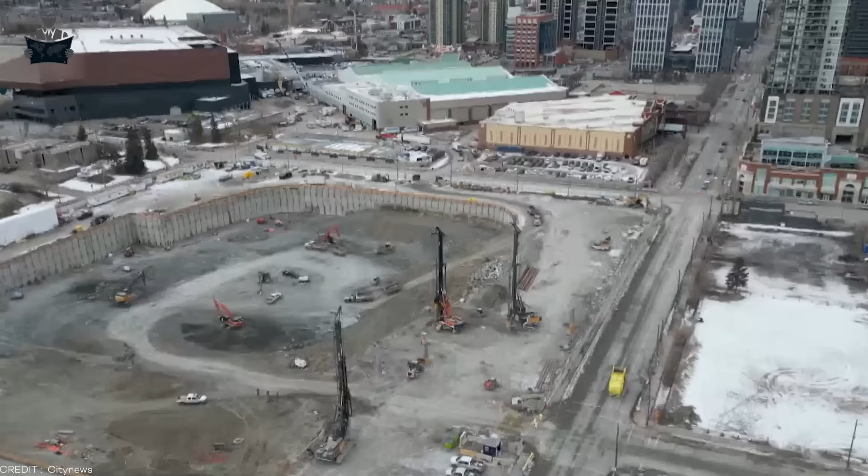At this very moment, a new arena is taking shape on the frozen soil of Calgary. But this is no ordinary arena. It's set to break records. However, these aren't the types of records to be proud of.

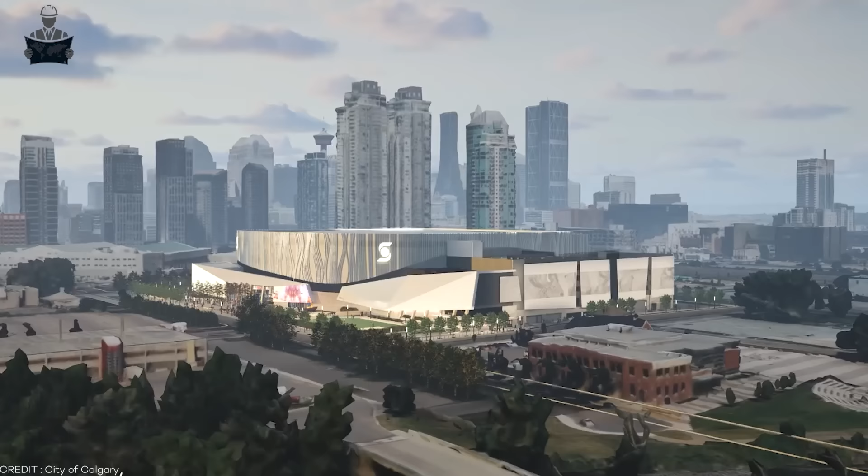With stunning architecture featuring a sophisticated facade, colossal screens, cultural motifs honoring history, and a sunken seating bowl that brings spectators closer to the action than ever before, Scotia Place is poised to set a new standard in North America, perhaps even the world.

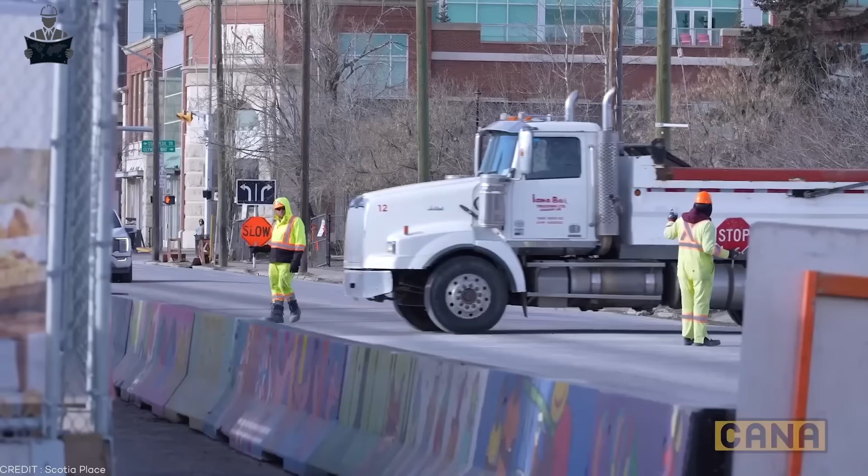As the deadline approaches and expectations peak, doubts emerge. Is the prematurely granted crown justified? And why is this project considered one of the most controversial in history? The time has come to delve into North America's new jewel, which, contrary to the chilly weather outside, is set to be on fire.

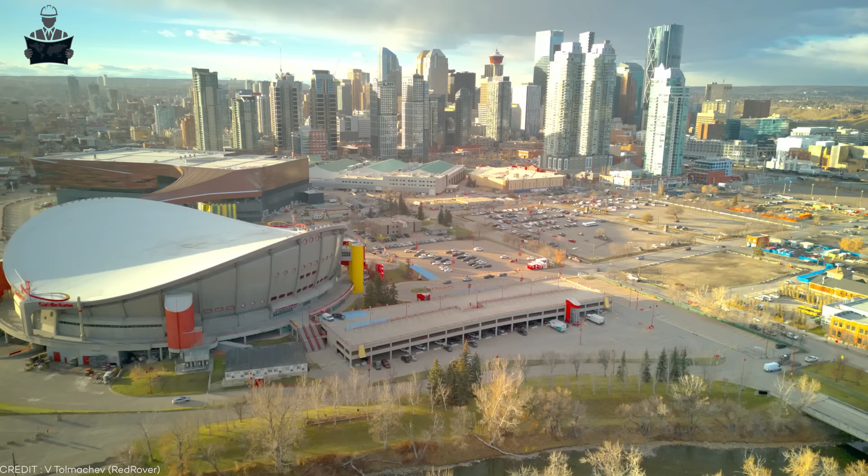Scotia Place didn't emerge out of nowhere. It's the product of years of planning, negotiations, and a bold vision for Calgary's future. The city's beloved Scotiabank Saddledome, home to the Calgary Flames for over 4 decades, was showing its age.

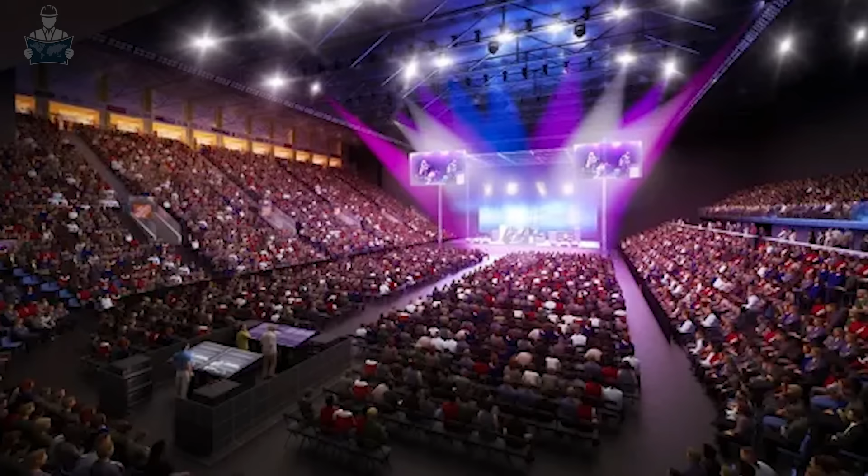Built in 1983, the arena hosted countless NHL games, concerts, and even the Winter Olympics. At the time, its distinctive saddle-shaped roof was an architectural marvel, making it one of the most recognizable arenas in North America. But its aging infrastructure, outdated amenities, and lack of modern revenue-generating features, such as premium suites and expanded concession areas, left it struggling to compete with modern venues across the continent.

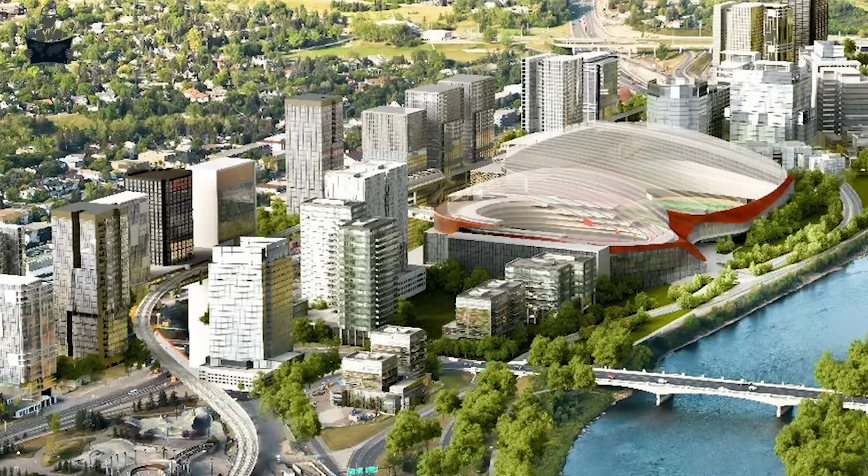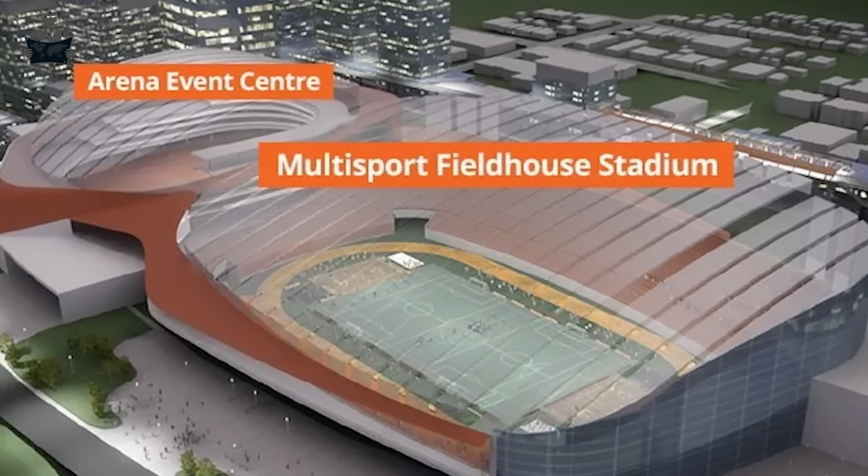The push for a replacement began in the early 2010s, but the most ambitious proposal came in 2015 with Calgary Next, a multi-purpose mega-project that aimed to replace both the Saddledome and McMahon Stadium. Planned for Calgary's West Village, it included a new arena, a football stadium, and a public field house.

However, what started as an ambitious plan for Calgary's future soon became a topic of intense debate, dividing opinions across the city. I'm not too sure about public funds going into it, considering it's a private corporation, but we'll see what happens. This is going to be a while before it's even finished.

Initial cost estimates of $890 million ballooned to over $1.8 billion, the equivalent of approximately $2.3 billion today, with taxpayers expected to cover the majority of the bill.

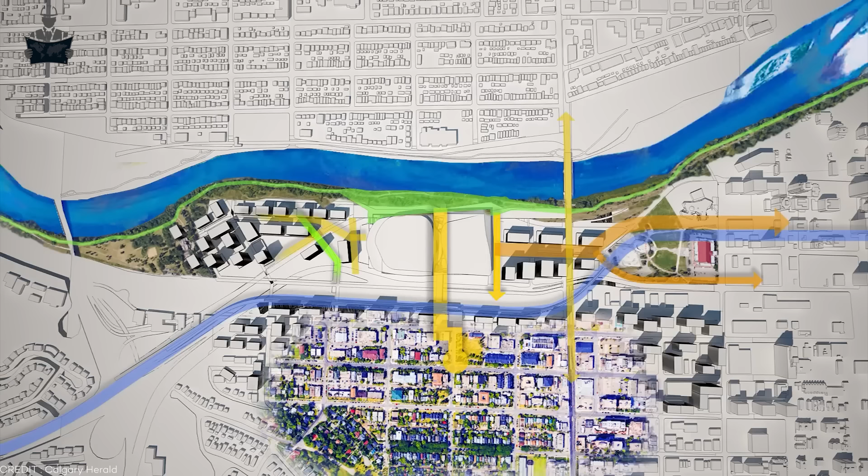Concerns arose over the proposed location, as the West Village site was contaminated with creosote, a toxic byproduct of industrial activity. Cleaning the land alone would have cost hundreds of millions. Skepticism grew over whether the economic benefits would justify the investment.

The project was met with fierce opposition from both city officials and residents, with many questioning why taxpayers should foot the bill for a private sports franchise. Calgary Next was officially abandoned in 2017 as too expensive and impractical.

What followed were years of tense negotiations between city officials, the Flames ownership group, Calgary Sports and Entertainment Corporation, and taxpayers. Several agreements fell through before the final deal was reached in 2023, marking the end of nearly a decade of uncertainty. On the surface, it seemed like a long-awaited breakthrough.

City leaders framed it as a win for Calgary's economy, the Flames' future, and the revitalization of downtown. But beneath the headlines, the financial details, which we'll reveal later, painted a far more unsettling picture, one that many Calgary residents weren't prepared for.

The project's success depended on the right team bringing it to life. Renowned architectural firms HOK and DIALOG were brought on board to design the arena, while structural engineering expertise is provided by Entuitive and Thornton Tomasetti. Their involvement is seen as a positive step toward revitalizing Calgary's vision for a modern sports and entertainment hub.

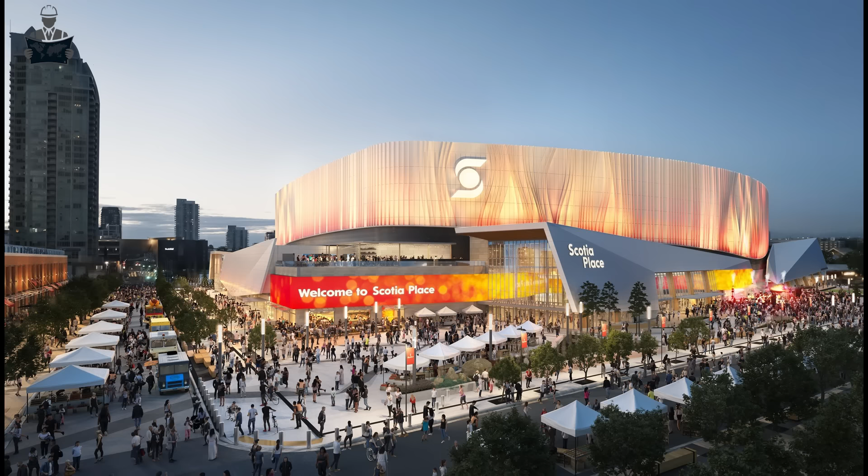With the vision set and the deal finalized, Scotia Place is no longer just an idea. It is about to become a reality. What will the arena look like when completed? And how will engineers bring its ambitious design to life? The next phase of the project will be nothing short of remarkable.

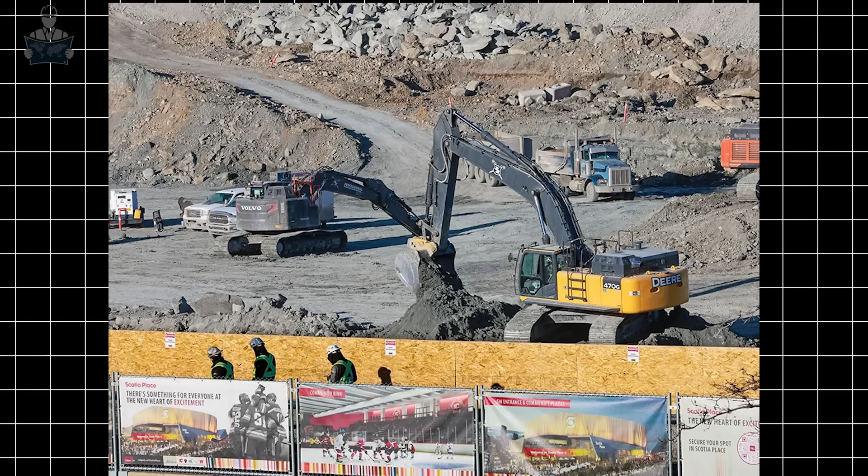Construction on Scotia Place officially broke ground on July 22, 2024, marking the start of a high-stakes, multi-year effort to redefine Calgary's sports and entertainment scene. Scheduled to open in the fall of 2027, just in time for the Calgary Flames to begin their 2027-2028 NHL season, the project is on an aggressive timeline.

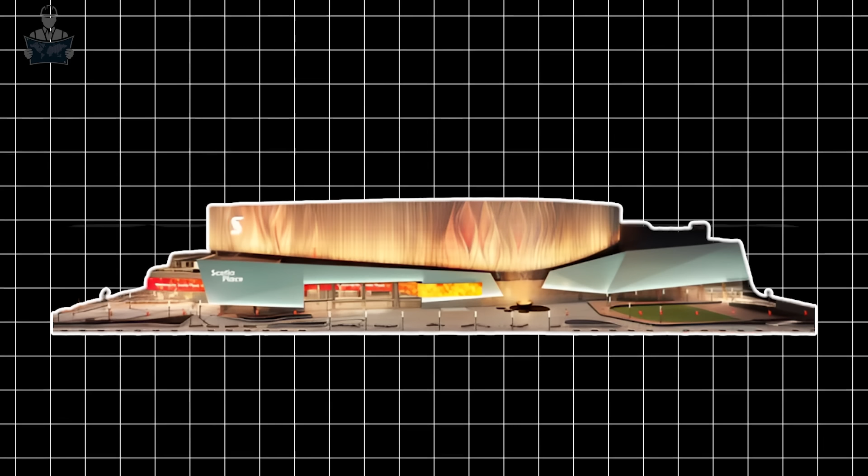The vision for this arena extends far beyond simply replacing the Saddledome. Designed to be a modern, high-tech venue, it promises to offer next-generation facilities that rival some of the most advanced stadiums worldwide. Unlike traditional arenas that dominate the skyline, Scotia Place features a sunken seating bowl, lowering the ice and event floor while ensuring the main concourse aligns seamlessly with street level.

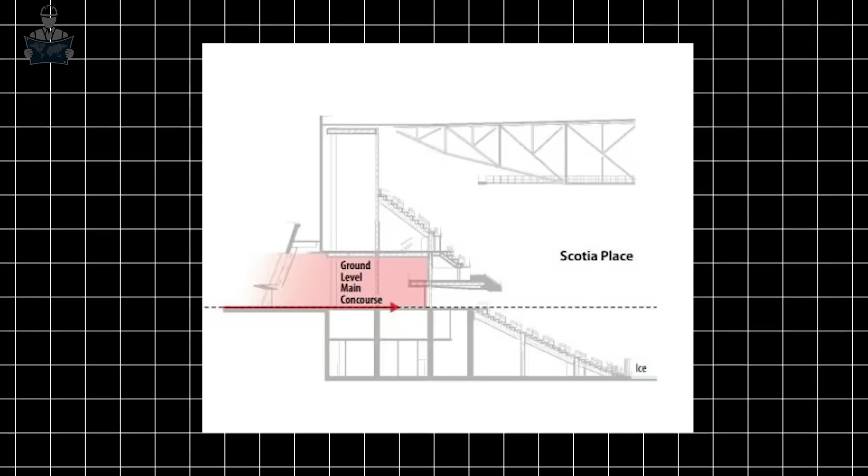This strategic design improves pedestrian access and provides natural insulation, reducing heating and cooling demands, an essential factor given Calgary's harsh winters. The sunken seating bowl is similar to arenas in the UBS Arena in New York, where accessibility was a key factor in design.

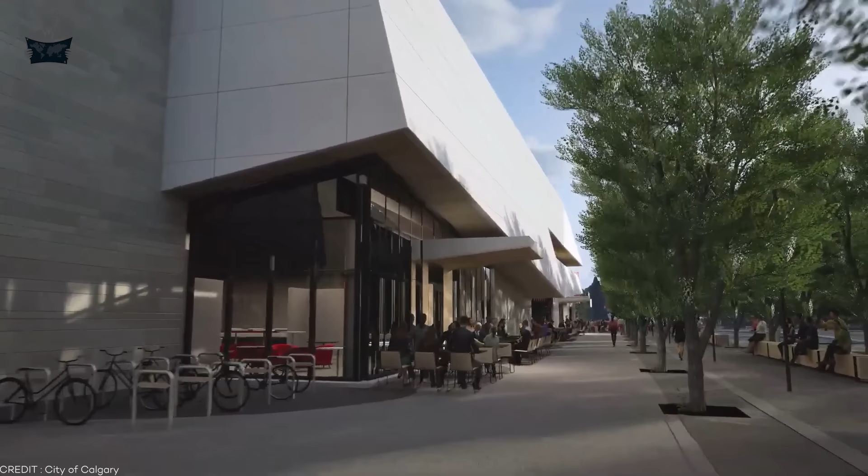The 1.15 million square foot arena isn't just about hockey. It will house a structured parking garage with 500 stalls, retail and commercial spaces, and 2 festival streets designed for year-round events. This ensures Scotia Place is not only a sports venue, but a permanent fixture in Calgary's entertainment district.

At its core, Scotia Place will feature an 18,400-seat main arena, meticulously designed to offer unobstructed sightlines for both hockey games and concerts. Above the rink, the 360-degree LED scoreboard, one of the largest in the NHL, will provide an immersive visual experience from every angle in the venue. This technology enhances fan engagement by delivering real-time stats, replays, and high-definition displays.

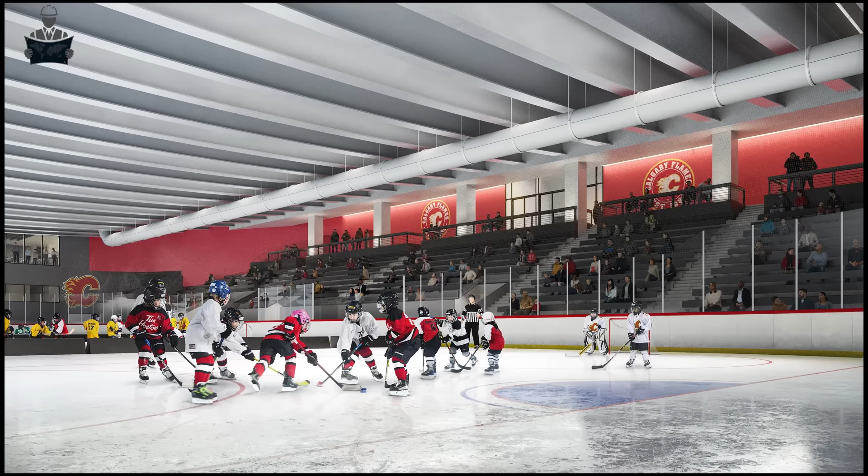Alongside the main arena, a 1,000-seat community rink will provide a year-round space for local teams, youth programs, and public skating, reinforcing Scotia Place's role as more than just a professional sports venue.

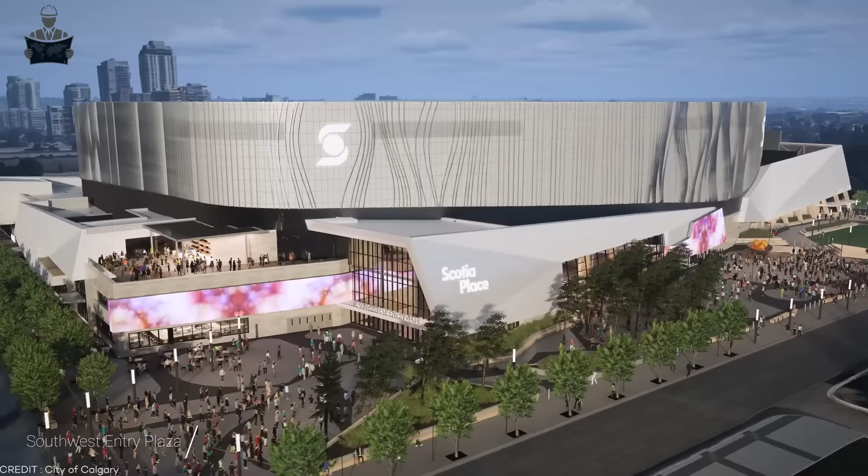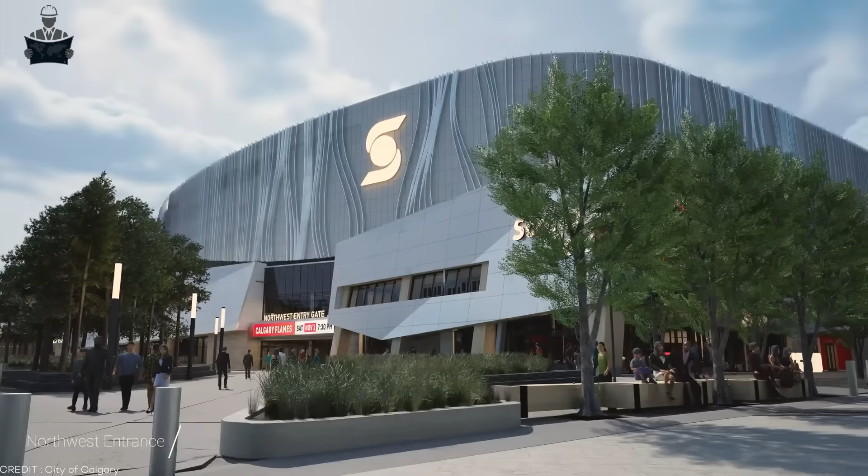While the interior is designed for maximum functionality, the exterior architecture ensures Scotia Place stands out in Calgary's skyline. The facade is composed of perforated metal panels and LED displays, allowing it to shift appearances depending on the event taking place inside. Beyond aesthetics, engineering and sustainability play a crucial role in the arena's construction.

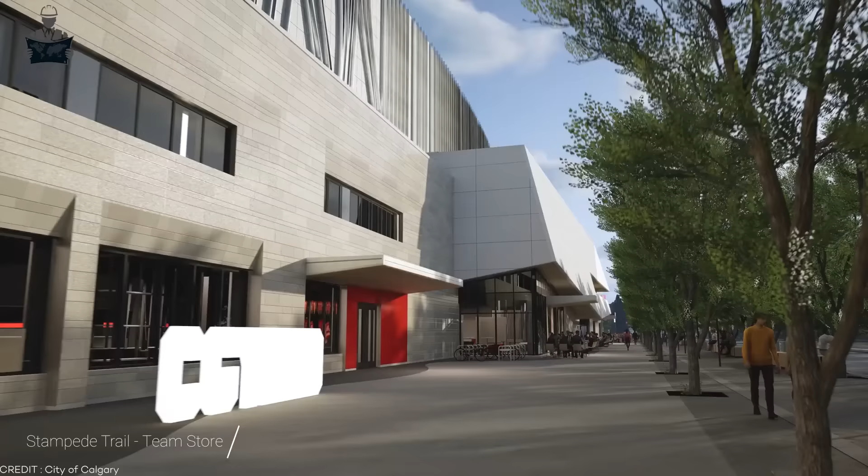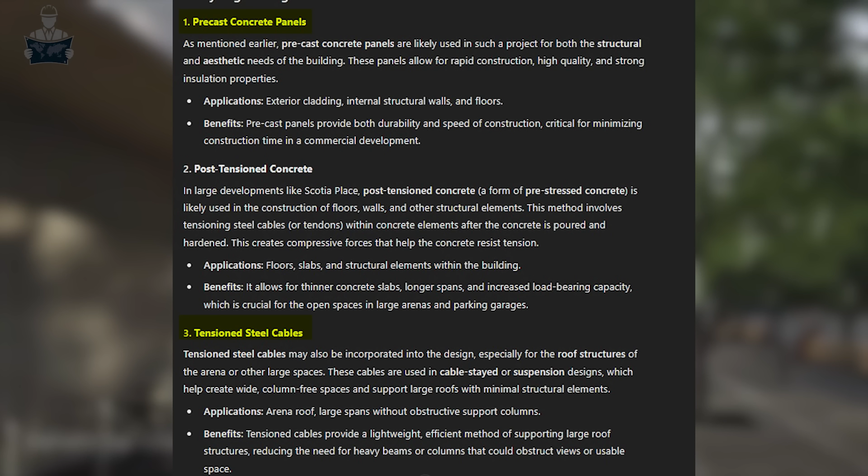The roof system, a particularly complex element, must withstand Calgary's extreme snow loads while remaining lightweight enough to span the massive event space below. Engineers have solved this by employing a combination of precast concrete panels and tensioned steel cables, a method successfully used in large-scale stadiums like Beijing's National Stadium, the Bird's Nest, to create both durability and efficiency.

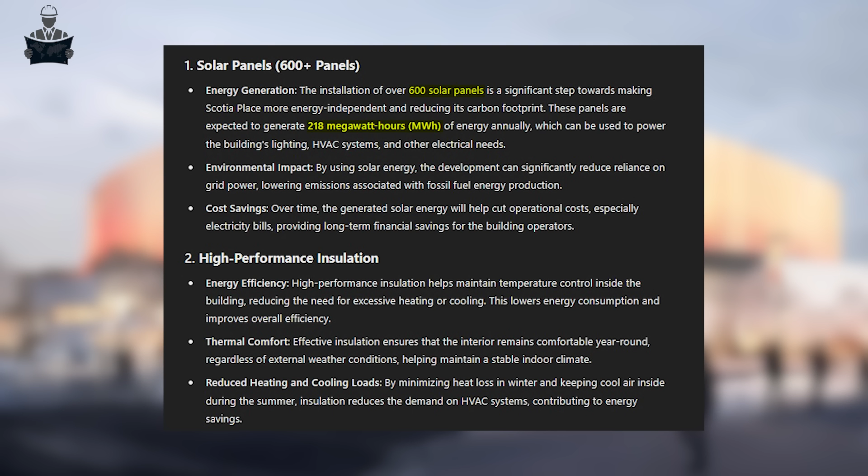Sustainability is also a key focus, with Scotia Place integrating over 600 solar panels, expected to generate 218 megawatt-hours of energy annually. Combined with high-performance insulation, reinforced concrete, and energy-efficient glazing, these elements will reduce the venue's long-term environmental impact and operational costs.

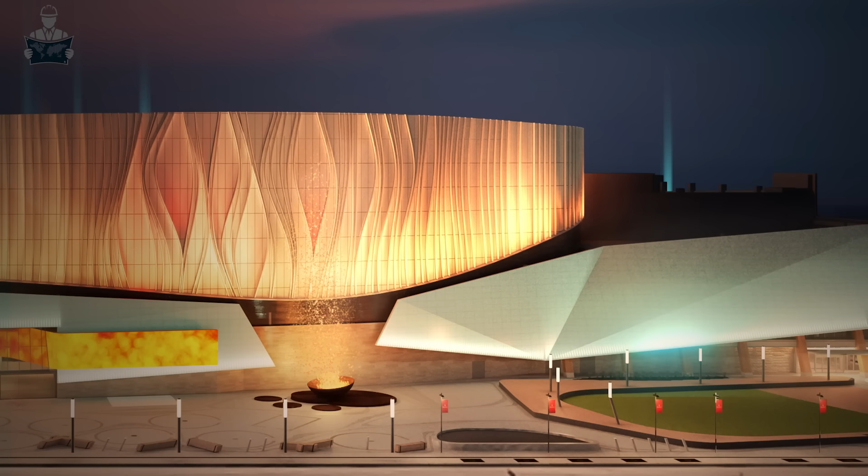Indigenous cultural elements have also been incorporated into the design, with art and storytelling motifs woven throughout the space, symbolizing fire, water, land, and air in tribute to the region's indigenous history.

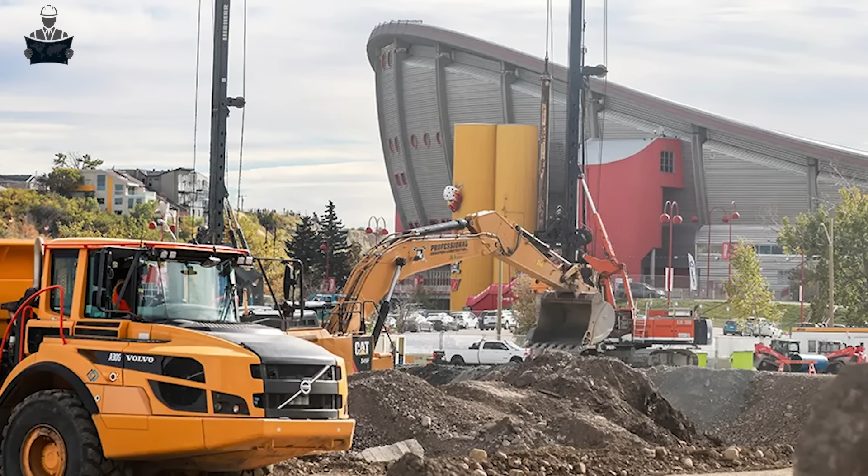Despite significant progress, construction has not been without challenges. The project required deep site excavation in 2023 before work on the foundation could begin. By 2024, steel framework assembly and core infrastructure installation were well underway, paving the way for HVAC systems, roofing, and facade elements to take shape in 2025.

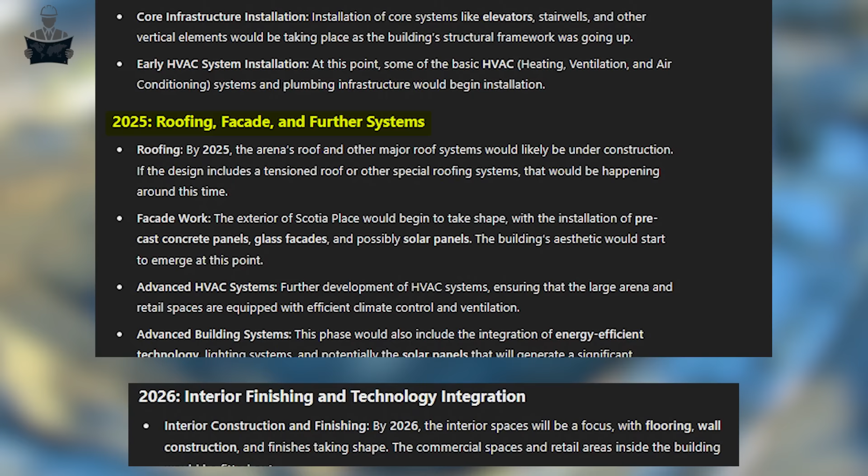Interior finishing and the integration of advanced technology, including a state-of-the-art sound system, will continue through 2026, with final testing and preparations scheduled for 2027 before Scotia Place officially opens its doors.

As the arena takes shape, excitement builds around its potential to transform Calgary's entertainment district. But will the final product justify its massive investment? And will the technology and design choices live up to expectations? The real test will begin once the doors finally open.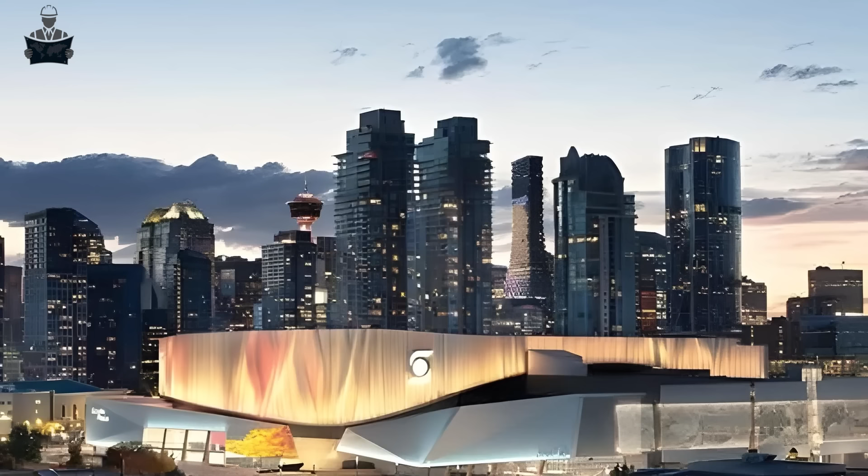Scotia Place represents Calgary's bold leap into the future of sports and entertainment. But at what price? The project's total cost is a staggering $1.2 billion, with over $800 million coming from public funds, the City of Calgary, and the Government of Alberta.

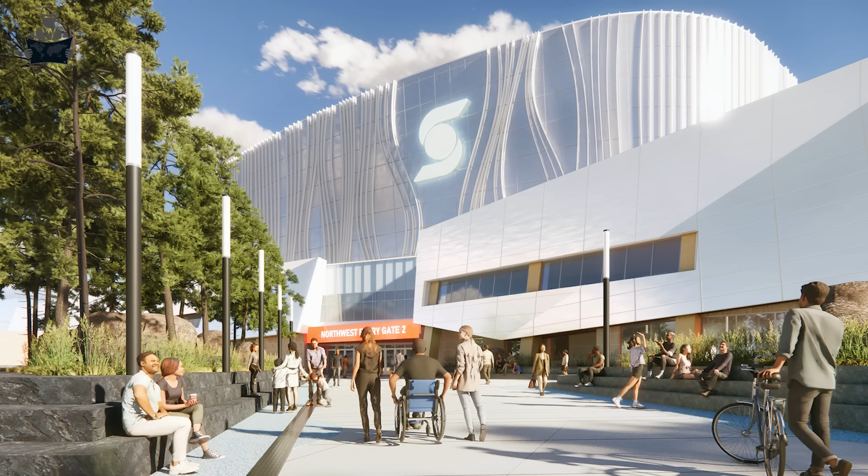The funding allocation has been one of the most contentious aspects of Scotia Place. According to city documents, the $330 million provincial contribution is primarily directed toward road and infrastructure improvements, land acquisition, and demolition of the existing stadium.

Up to $300 million will be used to support land purchases, a CTrain connection, road and bridge construction surrounding the event center, as well as the demolition of the Saddledome. However, critics argue that these upgrades disproportionately benefit the arena and nearby businesses rather than the general public.

The City of Calgary is contributing more than $500 million, which includes funding for the event center, community rink, public gathering spaces, and future development sites. Meanwhile, Calgary Sports and Entertainment Corporation, CSEC, the Flames' wealthy ownership group, is contributing only $356 million.

With taxpayers footing the majority of the bill, many see this as a one-sided deal. A state-of-the-art arena handed to CSEC on a silver platter, primed for profit while the public carries the financial risk.

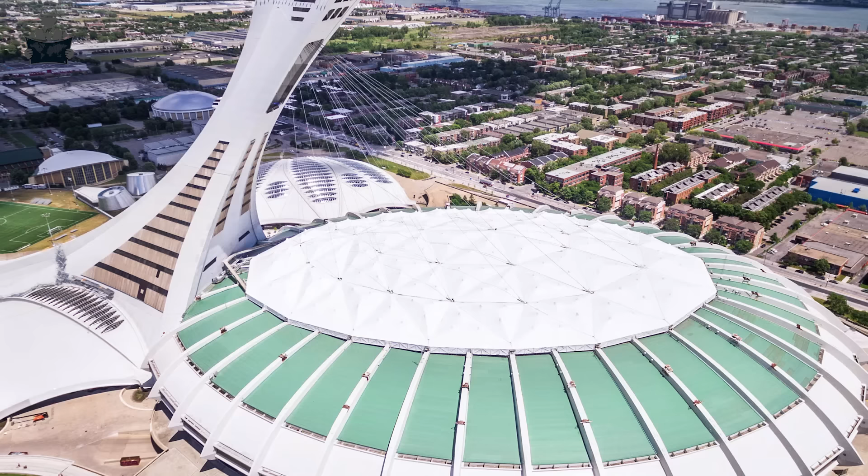Supporters argue that a modern arena will drive economic growth, boost tourism, and revitalize downtown Calgary. But history tells a different story. Many taxpayer-funded stadiums failed to deliver on their promises, leaving the public burdened with debt while private owners cash in. Montreal's Olympic Stadium remains a stark warning of government overspending, its financial mismanagement haunting taxpayers for decades.

Critics fear Scotia Place could follow a similar path. But it could also become a long-term economic engine for Calgary, generating significant revenue through ticket sales, sponsorships, tourism, and real estate development in the entertainment districts surrounding the area.

The Flames' strong fan base and Calgary's ability to attract major events, including NHL games, concerts, and international sporting competitions, could help offset some of the costs. However, success is anything but guaranteed.

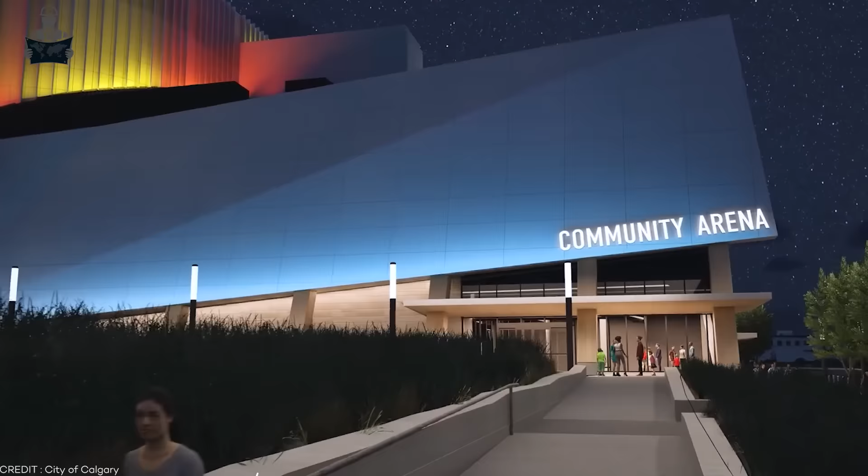The key risk factors include rising ticket prices, volatile attendance fluctuations, and the unpredictable shifts in Calgary's broader economic health. Even the most iconic stadiums, such as Brazil's Maracanã, have not been immune to financial turmoil and have struggled to maintain profitability.

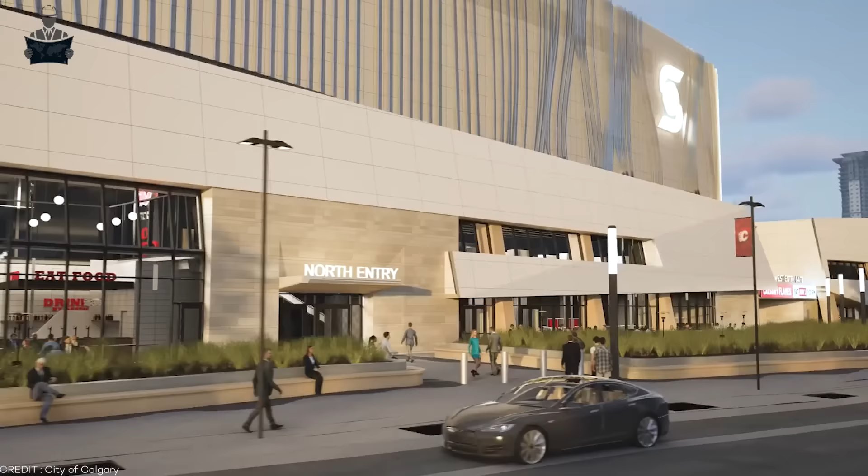So, will Scotia Place defy the odds? Will it reshape Calgary's future? Or will it be remembered as one of the most controversial taxpayer-funded projects in Canadian history? With years of construction still ahead, the true impact of this arena remains to be seen.